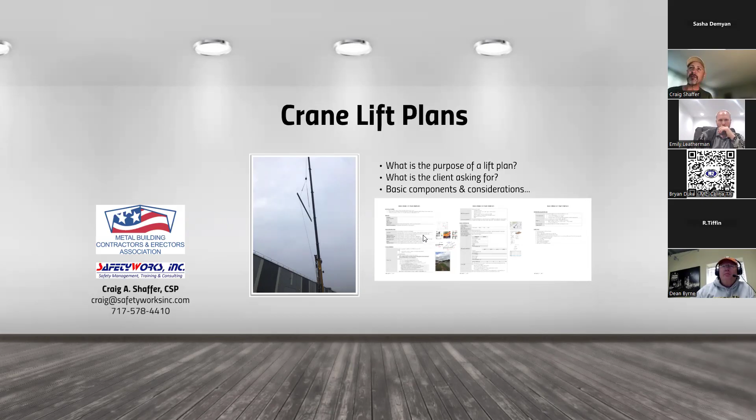One of the things, and I'm actually going to zoom in here a little bit on this, that's come up in some discussions leading up to this is, before you get started, talk with your client just to get their perspective of what they're expecting. Some clients don't expect anything, or they're not asking for anything. And some clients, on the opposite end of the spectrum, want an awful lot.

Some folks like the Army Corps of Engineers, maybe the Mine Safety and Health, MSHA folks. You could be working at a refinery, on or near an airport, hospital, places where they very much, due to the exposures around them, want a specific lift plan. And while this basic lift plan that we're going to go through covers a lot of material, they may want their own lift plan filled out instead of this one, or they may ask that you submit some additional information along with your lift plan.

So it's good to know that information up front as we go through this template right here. And as you're filling one out for your projects, you don't want to go through the whole thing and then find out they have their own form they want you to fill out, or there's additional information that delays your lift date and things like that.

I know, personally, sometimes I'm involved in pulling together a lift plan, but a lot of times I'm involved in reviewing them. They've been submitted by a subcontractor lifting anything from steel and metal building components to HVAC units to all kinds of different things. I usually ask for these about 2 weeks in advance. It gives me a chance to go through it, gives them a chance to provide any information I need.

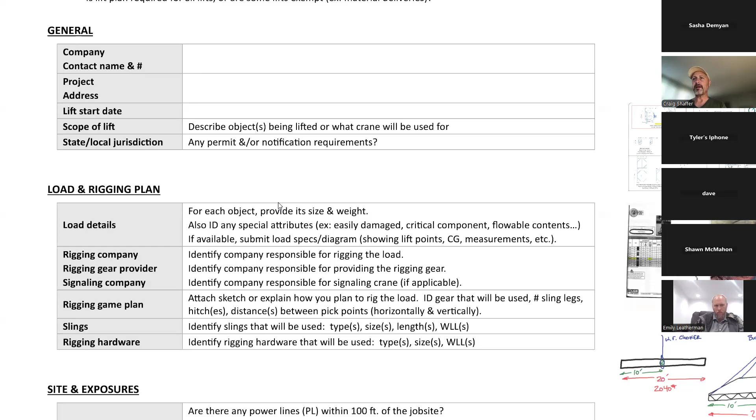And the other item that I had here in general is whether or not there's state or local jurisdictional requirements. I live here in South Central Pennsylvania. For the most part, not too many of those here, but I know Dave Lombach with Kaiser Martin. They run into some folks that might be the Army Corps of Engineers. It might be MSHA, and sometimes they run into situations where there is either permit or notifications or additional information required for that. So I know some cities get into permitting.

I know some jurisdictions, state. I know down in Maryland, not too far from me, if you're doing a special lift, if you're doing a tandem lift or more than one crane's making the lift, or if you're setting up, tearing down, or jumping a tower crane, they require a 48-hour notification to their, I call it Department of Labor, but I forget the name of their agency at the state level.

So again, depending where you are in the country, it's just something to remind you to check in. Are there any permits or notifications you need to make ahead of time? And again, depending where you are and what you're doing and who you're doing it for, you may have to or you may not. So that's the first one, just some general information.

I move on to the next part of this plan, and it's a little bit about the load and rigging. I talk a little bit about the load and rigging plan here, and then we'll get into the site itself and the exposures that might be on the site and things that go into helping us choose the right crane for the job. And then we'll talk a little bit about the crane specs, the size of crane, some other important information about the crane. We'll talk about the lift capacities of the crane, and then we'll get into personnel. So those are kind of the main parts of this.

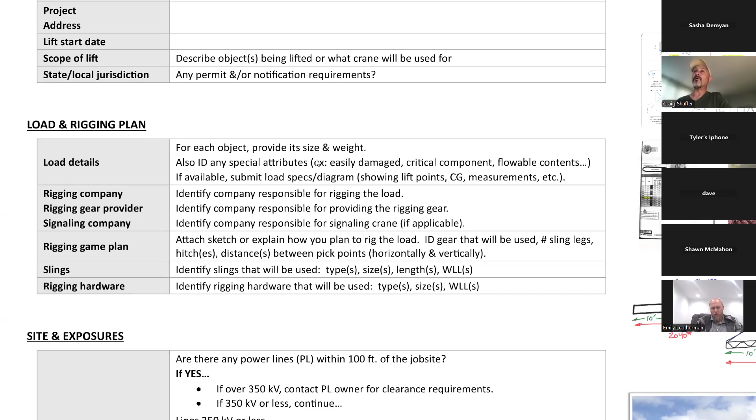A little later on I'm going to talk about critical lifts. One of the things that typically makes something a critical lift is you're lifting something that is in excess of 75% of the crane's capacity. I know some companies use 85%. I'm going to use 75% today in our discussion, but whatever you use.

But sometimes a critical lift is also lifting an object that is just very hard to replace, or the time schedule to get a replacement is very long. But anyway, just identifying that in the load details, and sometimes flowable contents too - a piece of equipment or machinery that maybe has something in it that can flow, that can cause a different distribution of the load as it's being lifted. Just little details like that make this load maybe something a little different than what a typical lift is.

Personally, when I'm looking at a lift plan and reviewing these kinds of things, this kind of information helps, and it helps minimize the amount of back and forth I need to have with folks, just to get an idea of what are we lifting here, what is its size or weight.

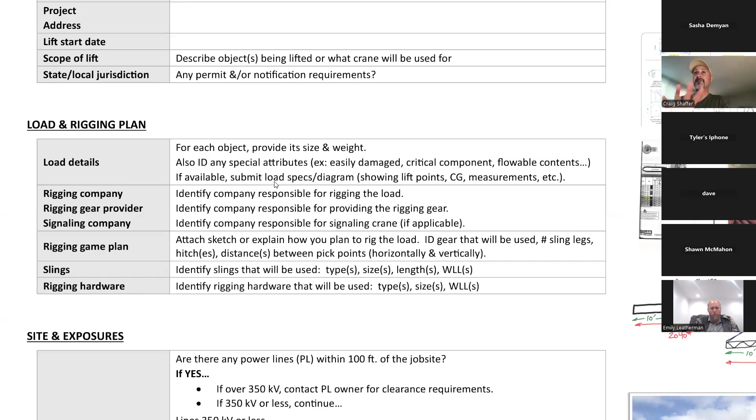For most things, a diagram, for steel components and things like that, we may not need a diagram of the actual object or of the site. It helps me to see what all is being shown. But I wanted to zoom in on this - this was a special medical device. It's called a gamma knife.

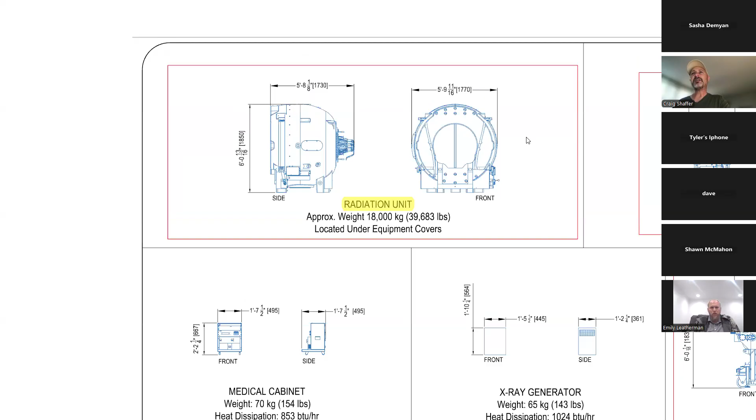For you folks that have cranes that may be rented out to lift objects that have little to do with metal buildings, something like this - there were other specs submitted that showed where the lift point was. It gave me an idea of what was being lifted. There was another spec that showed where the lifting eye bolts screwed in, and the distance between them and things like that.

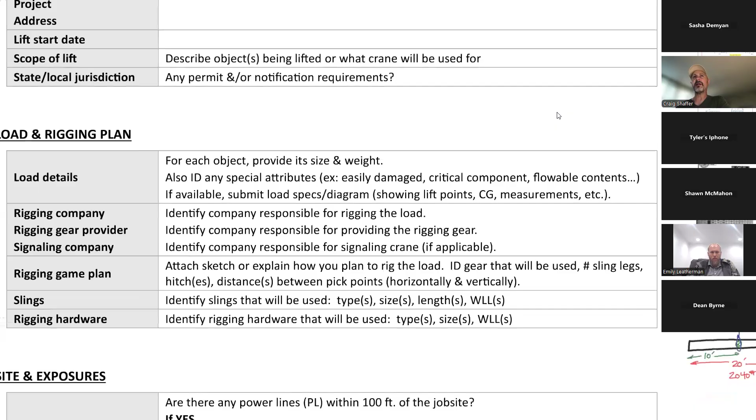So it provided a little bit of information for me to look at in terms of what all was going on. When you're putting together a lift plan, especially where somebody's going to be reviewing it, you're basically telling them a story. And our story starts with a load, and then it evolves into what we're rigging.

With something like that - now I don't have one in this little presentation here - but with that gamma knife I just showed you, they also had a diagram showing where its center of gravity was. Now it was a little less of an issue because the lift points, the eye bolts, were engineered.

But again, I can remember back a number of years ago, there was a large 20-some thousand pound rooftop unit being lifted onto Hershey's Children's Hospital, and they showed not only a diagram of the size of the object, but exactly where the center of gravity was and the specifications - how many inches from the left end the center of gravity was, how many inches up it was - showing exactly where the center of gravity was for lift planning purposes.

So again, with specialized objects, critical components, things like that, those load specs become very important. So that's a little bit about load details - you're just explaining what's being lifted. And not all of these things, depending on what you're lifting, are pertinent - some of it is, some isn't. From one lift to the next, or one job to the next, you can sort out of this rigging plan what's important and what isn't, but most of the stuff is.

Look at the next item here: rigging company, rigging gear provider, and signaling company. Personally, that's important to me. A lot of the rigging plans I get require information from both the company using the crane and the folks providing the crane. Sometimes it's the same company, sometimes it's not. A lot of the crane plans I get just come from the crane company, and if they're not doing the rigging or providing the gear, I don't necessarily get everything I need.

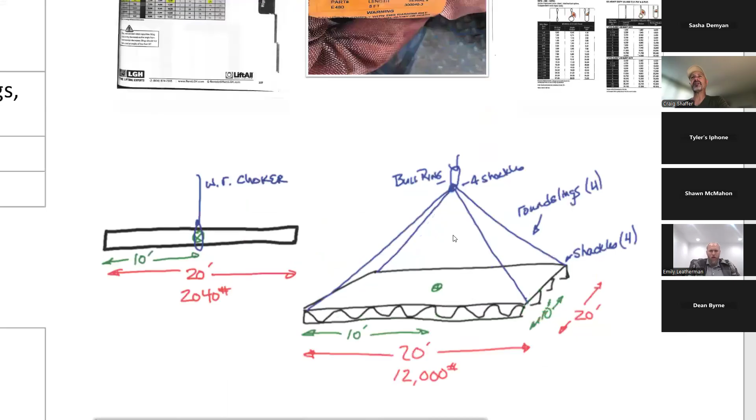Something like this—I call it my chicken scratch diagram—let's say it was a fabricated deck panel or something. These are supposed to represent bar joists. I'm a pretty poor artist, but you get the idea. Something that helps me visualize if somebody was lifting something like this into place lets me see what they're talking about. This one over here to the left is just a simple beam—I wouldn't expect somebody to have to sketch that.

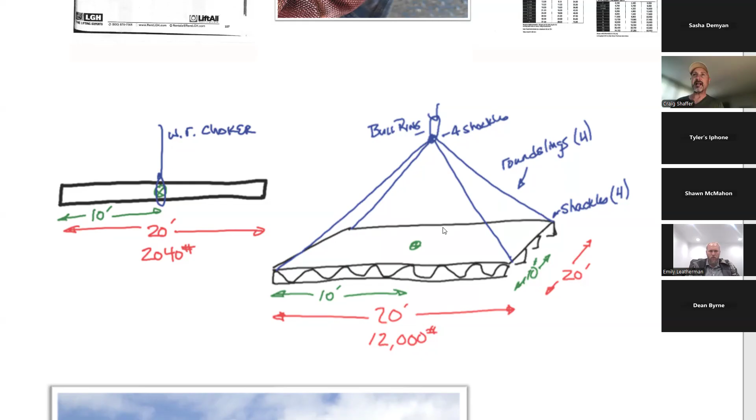But this one over here to the right, let me zoom in a bit—it shows the deck, gives some dimensions, and puts a little crosshair in the middle where we're anticipating the center of gravity is. It's basically showing four sling legs, with shackles making connections at the corners and at the top, and bull rings. It's a rudimentary sketch, but when I review it I can see we've got a total of 8 shackles, 4 round slings, and a bull ring—maybe more than one depending on the situation. It also gives me a distance between our connections, which helps me determine what our angles are going to be.

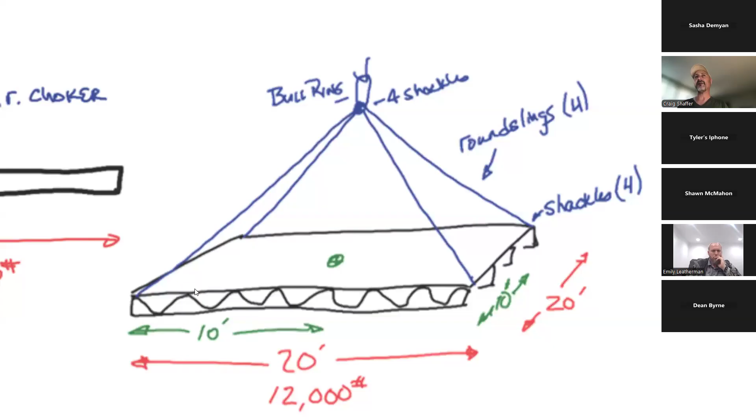My arrow is showing up on the diagram here, but we're talking about our sling angles. In this next part, when we're discussing our rigging, one of the things we indicate is not only the type—maybe round slings, maybe a 4-leg bridle—but depending how long those legs are, it helps determine the sling angle and ultimately how much they can lift. A little diagram like this helps a lot, especially if you have folks reviewing your rigging plan and lift plan—it helps them see it and hopefully generates fewer questions.

Now, the next part—that's the game plan, my thought process about how this is going to be rigged. Now I provide a bit more detail: what slings are we going to use? Identify the slings that will be used, what types—round slings, straps, wire rope, or chain, whatever we're going to use.

What's their size? From a wire rope standpoint, is it 1/2 inch, 5/8 inch, 3/4 inch, whatever it's going to be. For round slings, what size—size 7, size 5—again, those things are important. As far as sizes for straps, you're probably familiar with the type or size indicator on the strap.

It might be something like EE2-902, indicating it's a 2-ply sling, web grade 9 and 2 inches wide, whatever. But it just gives an idea of what type and size of sling we're using, and that way we can look and determine what the working load limits are.

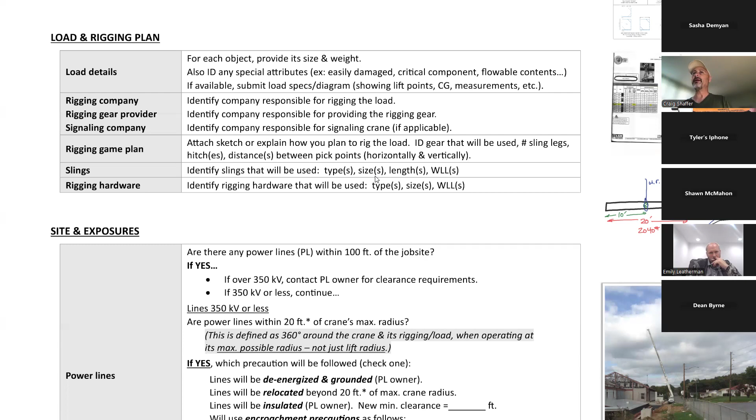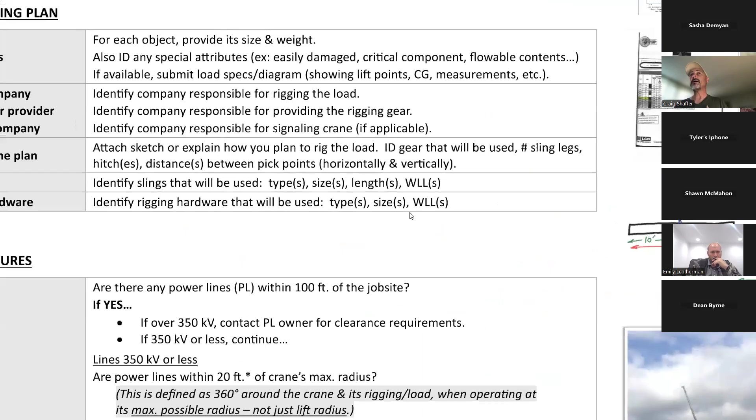It's important to put the length in there too, because when you go back to this drawing, it's important to know the length of sling. That helps determine what your working load limit's going to be based on your sling angle. So all those things are important when it comes to identifying your sling.

I've had folks do something like this - they'll submit with the rigging plan a copy showing here's the sling we're going to use. Here we've got 1, 2, 3, 4, 5, 6, looks like a size 7 here that they're going to use. They're showing me basket, and they've highlighted everything for me, which is wonderful.

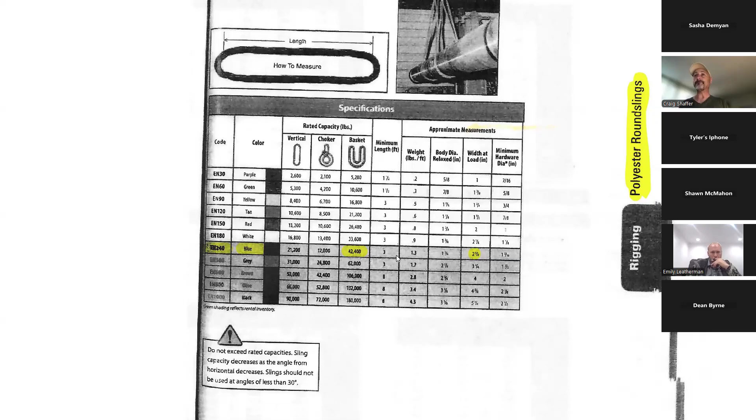Sometimes I get pictures - this is the sling we're going to use. Provides a lot of good information, most of the information that I need to know.

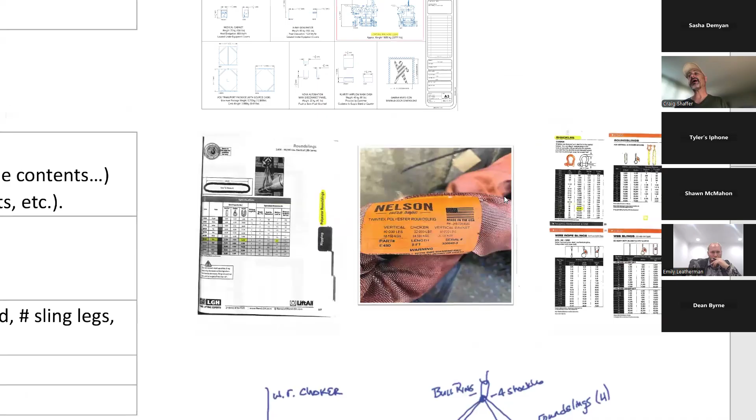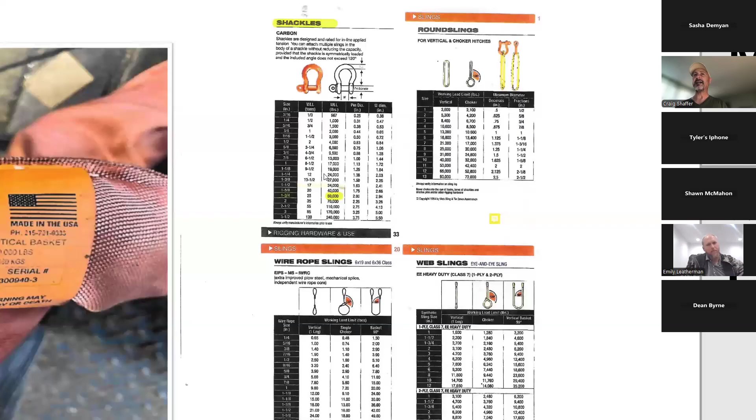And the same kind of information is important from your hardware as well - shackles, round sling shackles or eye bolts, hooks, things of that nature. Usually shackles are the big thing. Here they noted a 1 3/4 inch shackle.

One of the things I look at, particularly with round slings - some of you may have attended this back in Nashville in 2023 when we did the rigging class - we talked a little bit about round slings, and based on the size of your round sling, there's something called a minimum stock diameter. Whether you have one sling or two slings going into the shackle, that's just the diameter the shackle has to be to allow the yarns inside, the core yarns inside the sling, to adjust properly.

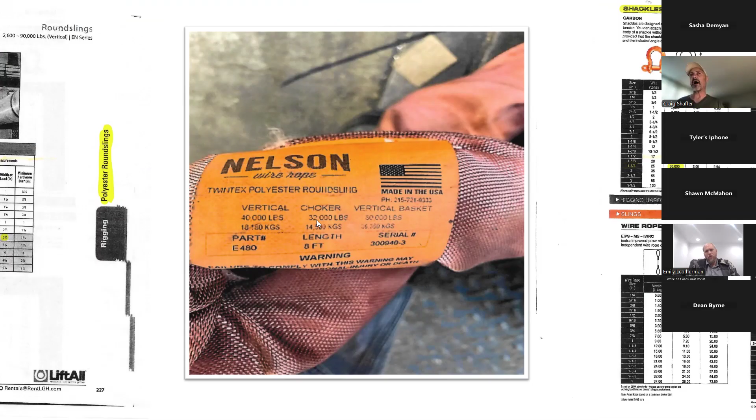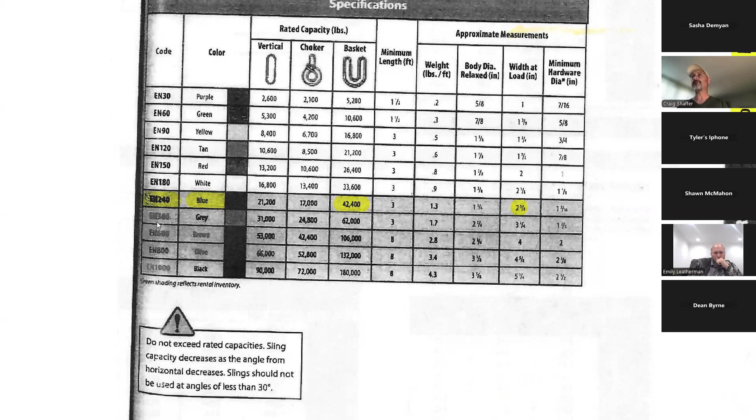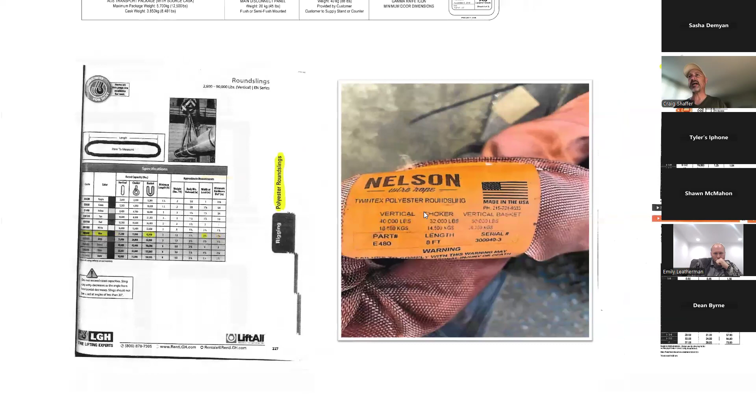So one of the things I'll look at, for example for an EN 480, I can go into my charts and look and see, okay, for an EN 480 that's being used right here, what's the minimum stock diameter? Just so that not only are they using a shackle that is properly sized based on its working load limit for that share of the load, but also that provides the appropriate minimum stock diameter.

Interestingly, with these folks that submitted this plan to me, back to this Gamma knife for a minute - they submitted a great plan, they did a really nice job with it. There was only one thing I picked up on, and it was minor, quite honestly. They provided the shackle size for this, and it was the correct shackle size for capacity, but in all actuality they needed one size larger to provide the minimum stock diameter.

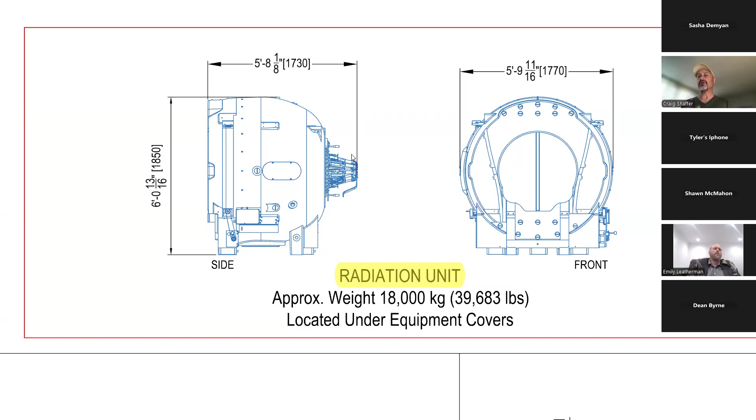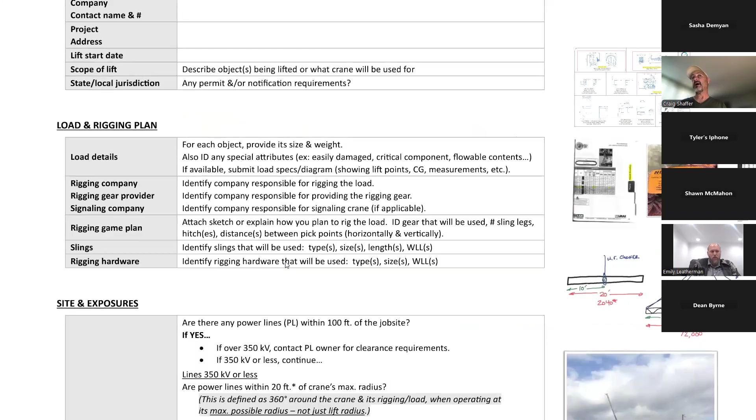So I think that's important too, especially if you use round slings a lot - I know a lot of people do - but that kind of gets into hardware. Identify your rigging hardware that will be used, the types, the sizes, and working load limits.

And providing these specs is really nice. It allows somebody like me, or whoever's reviewing your plan, to take a look at it. Just make sure what you provide them is the rigging you actually use.

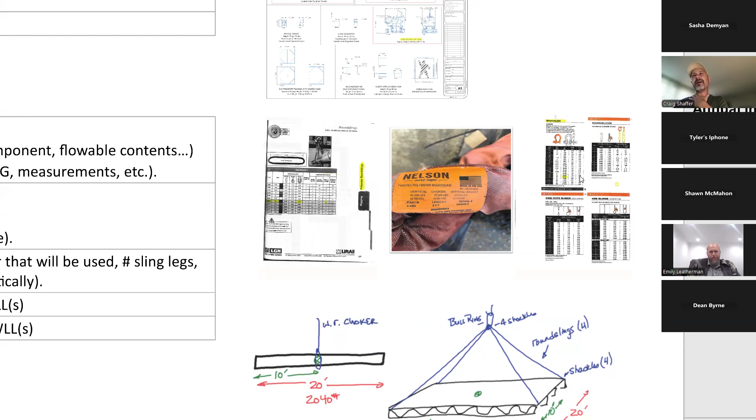A couple times I see we get this kind of information, and then I go out on the site, and maybe the information they provided was from Crosby, but I go out on the job site and they are not using Crosby shackles or anything else. So it's just important to make sure it's specific to the manufacturer.

So those are just some things involving load and rigging plan, and some of the most important details. You can certainly add to any of this plan as you go along. Some of you are pretty involved in putting rigging plans together and may have a rigging plan that goes well beyond this, but that's the load and the rigging part of it.

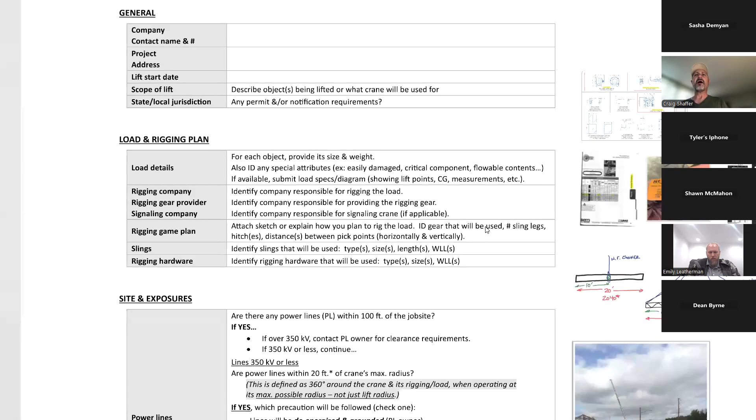The next part comes to site and site exposures. This was a job site I was on a few years ago - I was there with a general contractor, so there's a lot of things going on. This was a school project, and looking straight down the roadway, we're doing some steel work and swinging, but we do have power line exposures. Talking to those folks - Shaffer, we're not swinging over that way.

We're swinging over here to the building, and I get it, but there's some things that we need to do, even if we're staying at least 20 feet away from these lines, or maybe even 10 feet. I'll explain that more here in a minute. There are still things called encroachment precautions that we most likely will have to take.

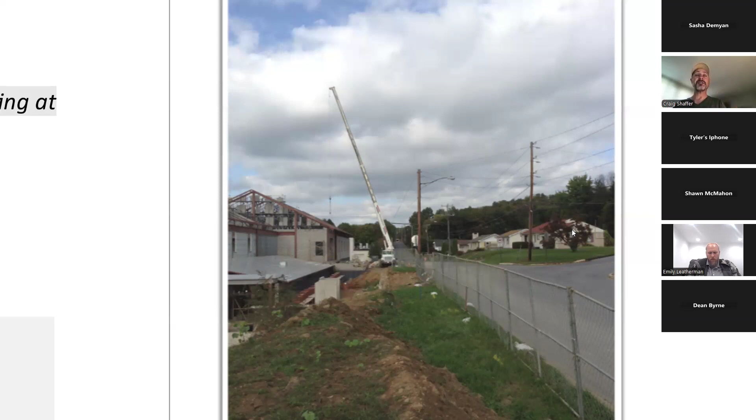So I'll come back to this in a minute, but before I get to it, let me talk about site exposures. We're going to talk about power lines, and then I'm going to come up here to the top and talk about other site exposures. But let me hit power lines here first. The first thing I ask is, on this job site, are there any power lines within 100 feet of the job site? Sometimes I'll even say 150 feet. I just want to know what we're dealing with.

And where they are, because again, our crane may be set up 70 feet away from the power lines. Are there any power line exposures? They'll say no. But yet, if I go out to the job site and the power lines are 70 feet away, well, Shaffer, we're not swinging that way. We're 70 feet away. We're fine. We just got to stay 20 feet. We're good. And that's fine. But,

in a situation like that, you're going to see this little part here in gray where it says power lines within 20 feet of the crane's maximum radius. This is defined as 360 degrees around the crane and its rigging or load when operating at its maximum possible radius, not just the lift radius. So if the crane at maximum radius could get within 20 feet of those lines, we have to do one of these things down below. So that's why I'm asking, is there anything within 100 feet of the job site? Just so I know where we fall into play down here.

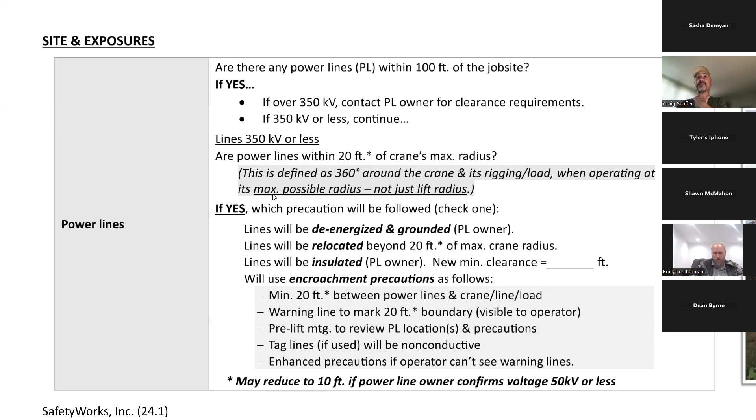But anyway, if the answer is yes to this, like I said, we got 4 options. We can have the lines de-energized and grounded. We're not doing that. That's got to be the power line owner. And again, I can't speak for anybody else, but I know here in Pennsylvania, at least where I live, that ain't happening tomorrow, and it ain't happening next week.

That's something we've got to plan in advance with those folks. I can't say they're not in a hurry, but it's a while till they get there. That's preferable. I mean, if they're de-energized and grounded, there's no clearance requirements then.

The next thing, the lines can possibly be relocated. I've had that happen. Again, at least here, it doesn't happen soon. It's something that takes a while to plan. But they have relocated the lines, or sometimes they'll put an outrigger on a power line to move the lines farther away to gain us those extra couple feet we needed. So that's an option. The relocating would be done by the power line owner as well.

The next one, lines insulated. Again, where I'm at, it's not often that the power line owner will put a dielectric or insulative covering over the power lines. Maybe they will where you're at, which is great. A lot of times that will reduce clearance. If so, that's great, and then you can put what the new clearance is. But those are 3 options that we have that are preferred. Obviously, de-energized is the best if we can do a scheduled outage.

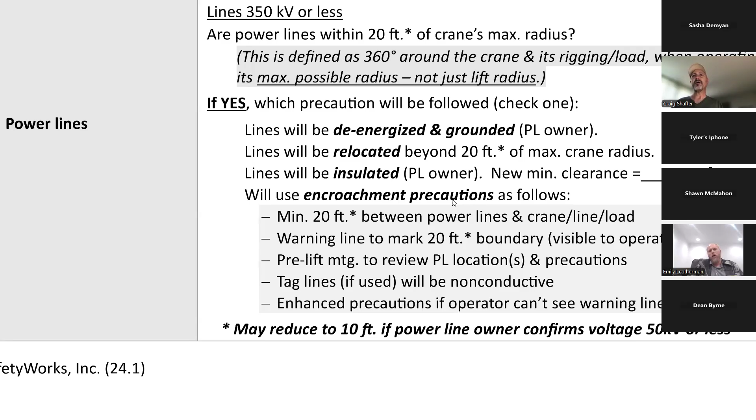But listen, you look at this 4th option. It says, we'll use encroachment precautions as follows. So I'm looking at the diagram that shows where the crane's going to be set up. And yes, at maximum radius, we could get within 20 feet or 10 feet of those power lines. However, where we are picking up our steel, where we are swinging it, it is not coming within 20 feet or 10 feet. That's where encroachment precautions come into play. They're pretty quick, pretty simple and easy.

And these are what we got to do. I rarely see these, but this is what we got to do. First of all, we got to maintain that minimum 20 feet or 10 feet to the power lines. Second thing, warning line to mark the 20-foot boundary visible to the operator. Now, listen, it can be flagging, it could be cones. I've seen high vis markers, things like that, but just something that sticks out to the crane operator and to the people rigging, signaling, and that are in the area, that the crane cannot go beyond this point. So even if we're 70 feet away, you still got to put those up. It's not hard. It doesn't take long, but that visual barrier still has to be there.

And that's important. Next, pre-lift meeting to review the power line locations and precautions. So as part of the pre-lift meeting, it's kind of, hey, don't forget, we got power lines over here. We got the cones, we got the high vis markers set up. Just a reminder, you folks that are signaling, don't swing past that. Crane operator knows not to swing past that. All stop before we get to that point. Tag lines, if used, will be non-conductive. So non-conductive tag lines or use of insulating links for the tag lines if we're going to be in this encroachment range.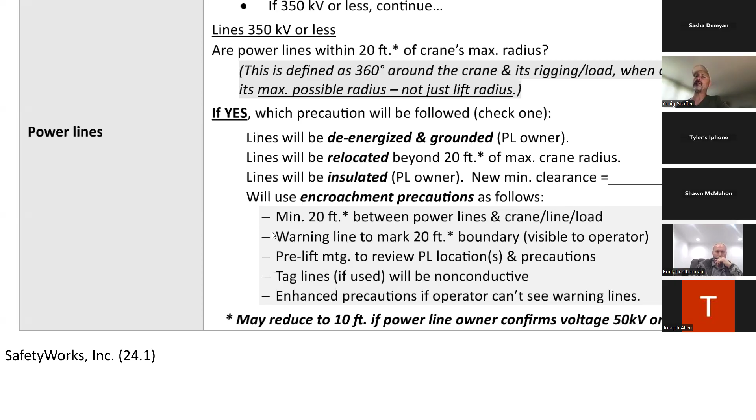And finally, enhanced precautions if the operator can't see the warning line. This involves the use of spotters and another safety precaution. There's a number of those. If you need them, you're welcome to email me or call me. But there's range warning devices. I know I had a crane one time where we used an insulating link in addition to the spotter. So those are both options that were able to be used. This is probably, in addition to the surface on which a crane sets, one of the biggest exposures we have, and that can really ruin an otherwise good and productive day, is just knowing where these power line exposures are and what we need to do.

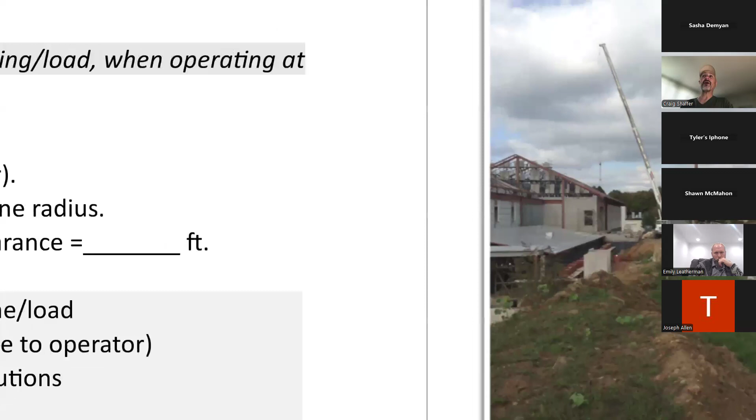I often run into cranes just like this one, where they were picking in the background. So at no point did they need to swing within 20 feet of those lines. I mean, they're pretty close to it right now. In actuality, they did call; I forget what the voltage was, but it was less than 50,000. So it was actually 10 feet was their required clearance. But they need to have cones set up kind of parallel along here just to mark their no swing boundary.

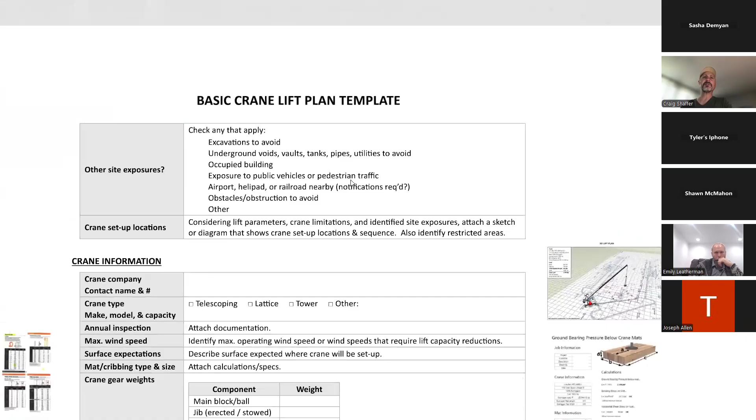Okay. Other site exposures. So power lines are a biggie, but listen, are there other things? And this is where a general contractor is helpful as well. As a matter of fact, there are a couple things. When we deal with cranes, there are two things specifically that a general contractor is responsible to do.

The first thing has to do with these items right here. Identifying and notifying the crane operator, I guess more so the second item here, the ground underground voids, vaults, tanks, things like that. If the general contractor is aware of any of these things, underground voids, vaults, tanks, pipes, utilities, they need to communicate that to the crane people, obviously, so we don't want to set our crane up over, especially outriggers. We don't want it over top of that. So if they have been informed of this through maybe a municipality or by the client itself, they're responsible for forwarding that information to the crane operator.

The other requirement GCs have is to provide a safe location for the crane to set up, and I'll talk about that here in a minute. But other things, just to identify in our plan, whether there's excavations that we need to avoid when we set up the crane. Is there an occupied or partially occupied building where an evacuation or partial evacuation may be necessary for parts of the lift or the whole lift? Exposure to public vehicles or public traffic where a traffic control plan may be needed. Is there an airport, helipad, or railroad nearby requiring notifications and coordination there?

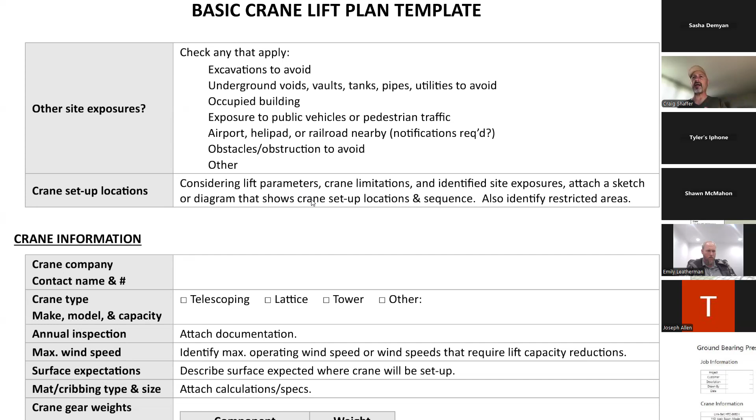Consider lift parameters. In other words, all right, here's what we got to lift. Here's how far in off the roof or how far in on the pad that we have to lift it. How much it weighs. That and lift charts all kind of determine what size of a crane we're going to need. But now, we also have to consider, okay, we'd like to set up where it's an 80-foot radius. But you know what? This area where it's 80-foot radius has some pipes running underground. We can't set up there. We got to set up at another place that's now 100 feet radius or 120 feet. So again, some of these things up above may drive where this crane has to set up.

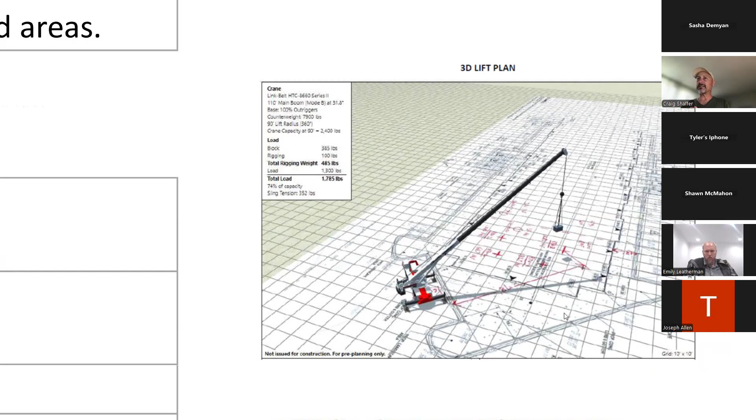So consider our sketch, considering lift parameters, the crane limitations, and identified site exposures. Personally, I like to see a sketch because it just kind of visualizes. Here's a pretty nice one here. Just showing here's the outline of the building, or the pad. In this case here, they're setting what appears to be an HVAC unit onto a roof, but it shows me where the crane's at, and they've added some additional information. It's kind of hard to see here. I lose a little bit of the definition of this picture, but anyway, they're giving me radius here, giving me some other important specifications for this lift. What we're getting into next is the lift plan.

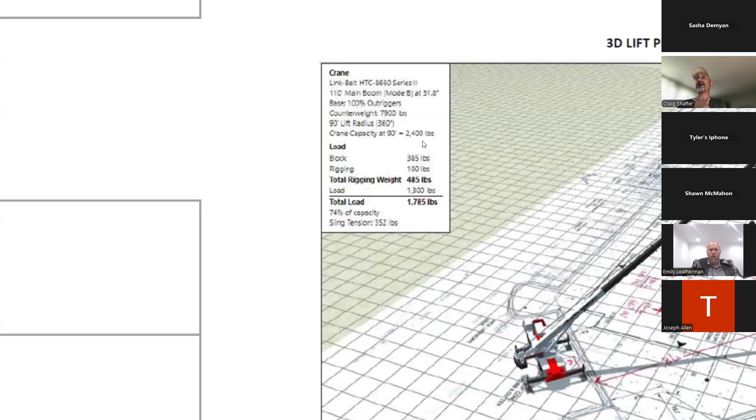So not only is this telling me a little bit about the crane, the base that they're expecting, lift radius, it tells me the crane's capacity for what they're being set up as, but also the block, the rigging weight, the total rigging weight, the load capacity. So in other words, we're going to get what our total load is between the rigging, the crane items, and the load, and we're going to compare that to what the crane's capacity is. That's really what part of this is right here. This gets into the crane information.

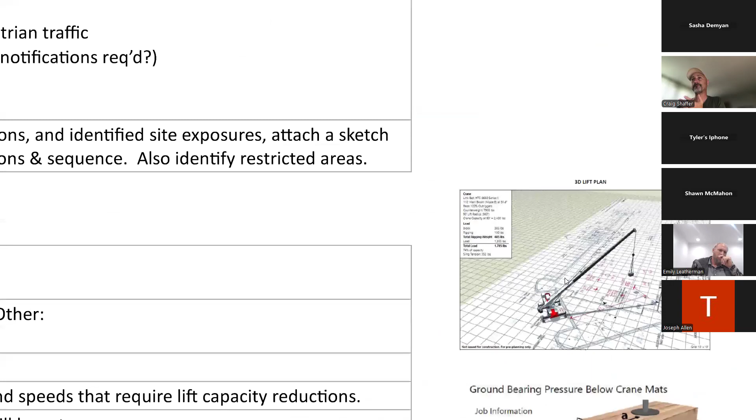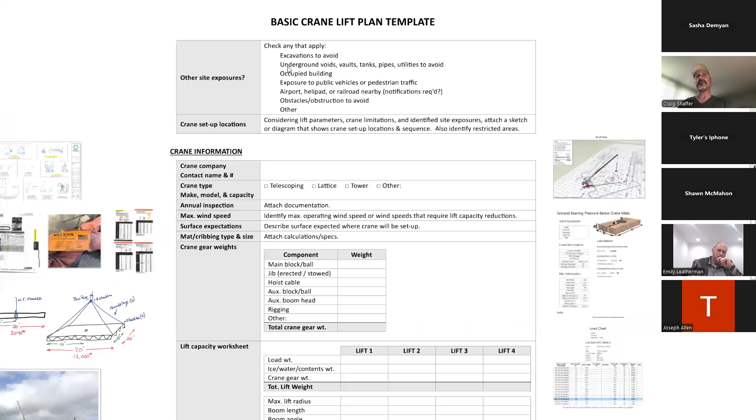But the reason I really showed you this picture is it gives me an idea of where the crane is setting up, where it is reaching to, so I can see where we're planning. Sometimes it's just one place the crane's setting up. Sometimes it's multiple places. And again, providing that information to whoever's reviewing your crane plan is very important. Now, looking over here to our next segment. This last segment was a little bit about the site and site exposures. This next one is about the crane.

And now, ultimately, we are getting down here where it says lift percentage of crane capacity. A lot of these lift plans have this in. I really like when they provide that. They've done the math for me. This is a number I'm looking at.

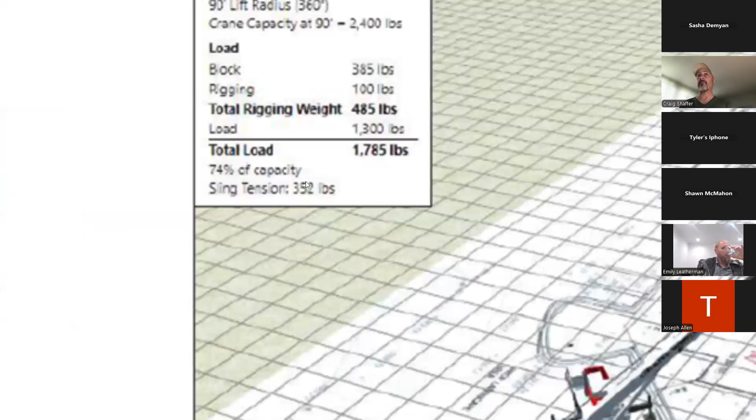Quite honestly, I prefer to see it below 75, which this one barely is. You get over 75, you have a critical lift. And a lot of folks, including myself, want a critical lift plan at that point, which involves some more documentation.

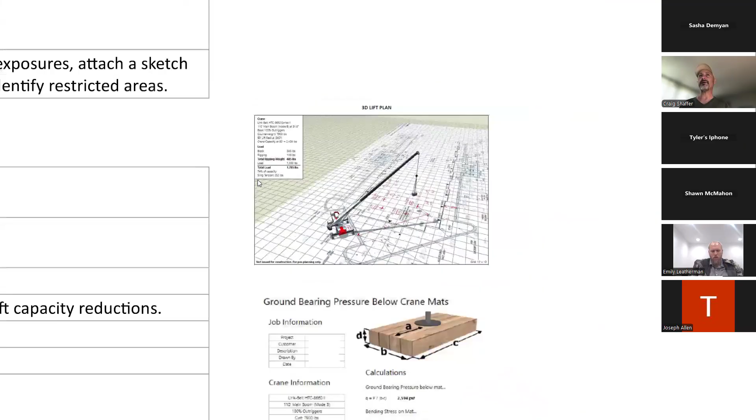But let's look at crane information here a minute. First of all, who's the crane company and what's the contact name and information? So that's the first thing, pretty easy. What type of crane are you bringing onto site? I know for me, most of the time it's a mobile telescoping crane, but sometimes it's not. Sometimes it's a different crane.

Make, model, and capacity. I ask that they attach documentation of their current annual inspection. Just something that I review, that I match that crane inspection documentation with the crane that they have just identified in the previous section right here.

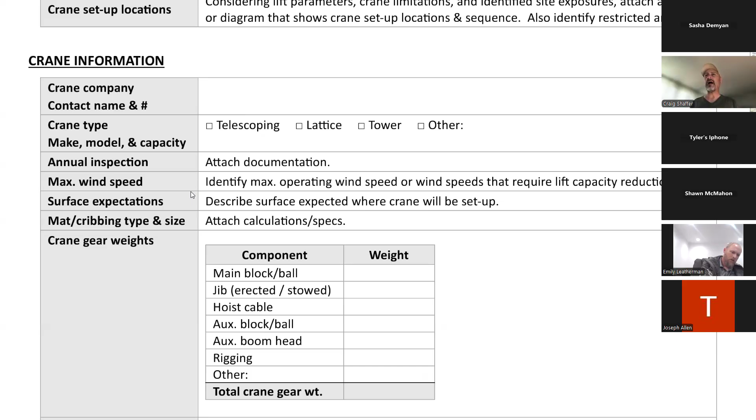Maximum wind speed. Personally, I don't want this to be a subject of debate on the job site. This should be known ahead of time. The crane manufacturer sets what their maximum wind speed is. Some cranes say, look, you are good up to this amount of wind speed. And others give it graduated: up to this wind speed you're good, up to the next wind speed you have to reduce your lift capacity by X number of percent, and then you can't go beyond this wind speed.

So whatever those parameters are, I want them known ahead of time so that not only us, but the general contractor, everybody's on the same page. I'm quite sure everybody here is probably familiar with the big blue crane collapse years ago when they were building the Milwaukee Brewers stadium, Miller Park. Wind speed was a key factor in that. And what we're trying to prevent is poor decision making. When this is known up front, we're all understanding it.

Surface expectations. This gives my crane folks a chance to explain to the general contractor what surface they need to set the crane on. A lot of times it's pretty straightforward, an improved base or something that can hold so many pounds per square foot, or something with a gravel base, whatever your crane manufacturer specifies, but you're communicating this up front.

Because again, if we're working on a site where we've got an awful lot of mud and it's kind of sloppy, soft, things like that, it gives them a chance to coordinate with the site contractor and get improvements made. They are responsible for providing a surface that is acceptable for our crane to set up on. And by the way, for you to lay your steel down on as well. That certainly applies also.

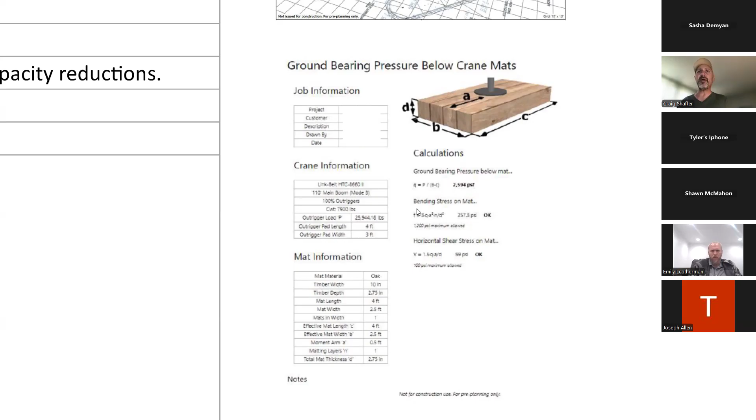So down here, it's oak material. They give the specs on the height, the width, the length, and all that kind of stuff there. But then I'm looking down through here. This is the mathematical part: here's the maximum allowed, here's where we're at, we're good to go. Here's the maximum allowed, here's where we're at, we're good to go. So I can see this.

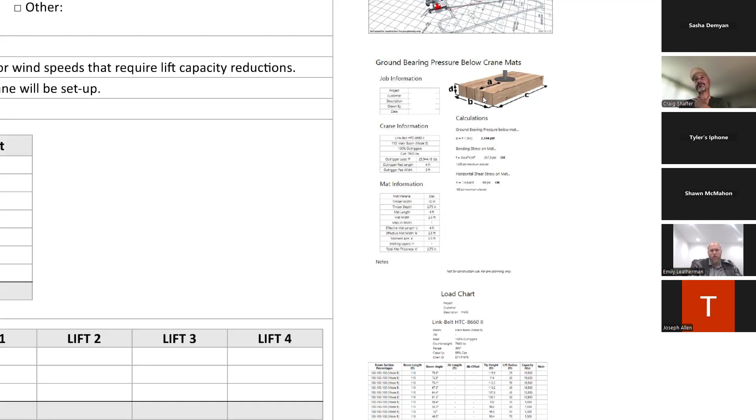Now, it also shows my superintendent this is what it should look like, versus three 4x4s. I'm being a little ridiculous here, but not all the time is it nice, neat, and tidy like this. And sometimes I get some sloppy cribbing that is not what was advertised in their lift plan. So I do want to see this kind of information.

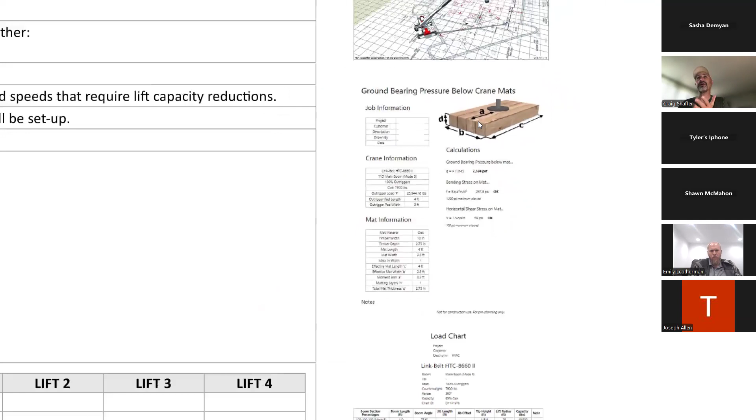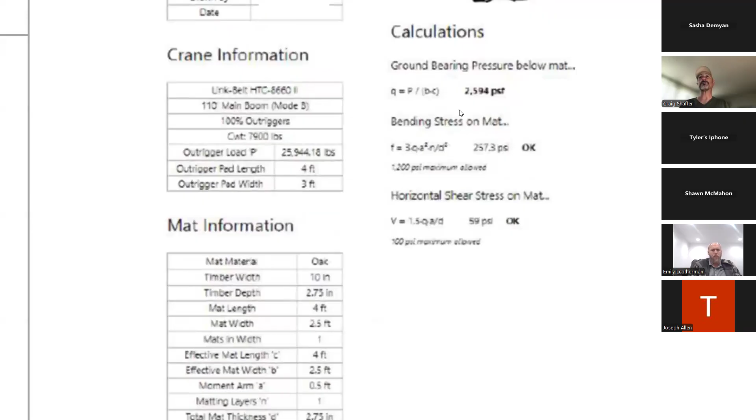So again, for the crane company, this is the stuff that gets spit out in their computer programs, but it's really nice for somebody who's reviewing it to make sure that your crane will be able to rest on a surface. It's providing our ground bearing pressure below the mat. Right there, it's telling you how many pounds per square foot, and they can compare that with the bearing capacity of the soil or the surface. So it's good information, important information for them to have.

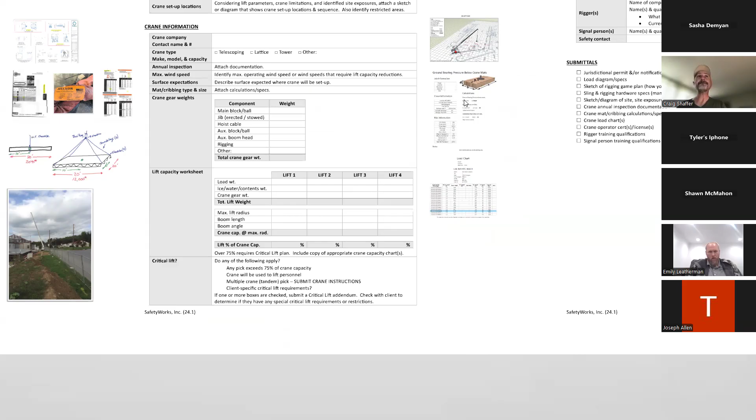And again, I can't speak for the Army Corps of Engineers, but I can imagine they look at stuff like that. The next thing up here in our crane information is just the crane gear weights. You saw this a little bit in this crane plan that was listed up here. I'll zoom in just for a second, but you saw the block, 385 pounds. The rigging was 100 pounds, and there you go. But this just gives us a chance to add in any weight we need to add. So from the crane company standpoint, here's our total crane gear weight.

Down below, we're going to identify our load weight. How much is the weight of the load? You know, listen, I saw in the weather there's parts of the country already getting hit pretty good with snow. So sometimes, especially when we're lifting big items, ice, water, we need to account for that weight, because something with a large amount of surface area, it's an awful lot of weight. Sometimes we have specs that say this special object we're lifting for a client weighs this much, but that special object's got stuff in it. It's got contents in it that we might have to add weight for.

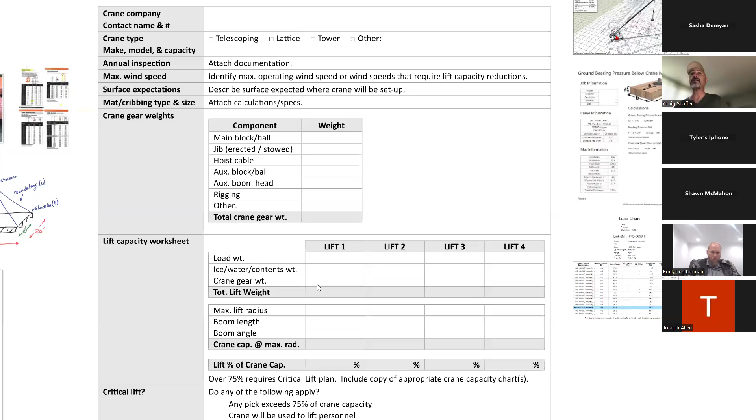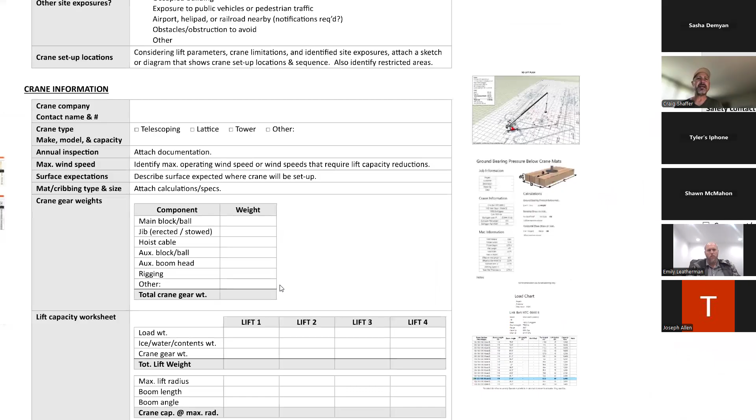So this is where we've got not a rigging weight, but our crane gear weight up here. And down here we got our load weight. Add that to the gear weight, and that's our total lift weight. So you saw on my example up here, the crane gear weight was 485. What they were lifting was 1,300. The total lift weight, 1,785, was what they came up with. So this lays out in a nice, easy to follow table what we're providing. And I have lift 1, lift 2. If we're lifting different objects, it allows you to provide for each one of those.

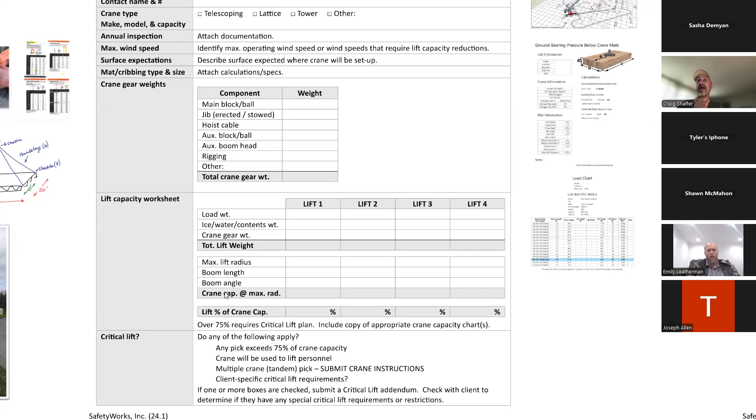Down here's where they're telling me about the crane. What's the lift radius? What's the boom length? What's the boom angle? And then what's the crane capacity at that maximum radius? Again, this lines it all right out for me. Up here, they told me the lift radius and the crane capacity at that lift radius. Up here's the boom and what the angle was, and the computer spits out 2,400 pounds. 74% capacity. So they took their total load, divided it by the total capacity, 74%. Again, we try to stay 75 or below with that.

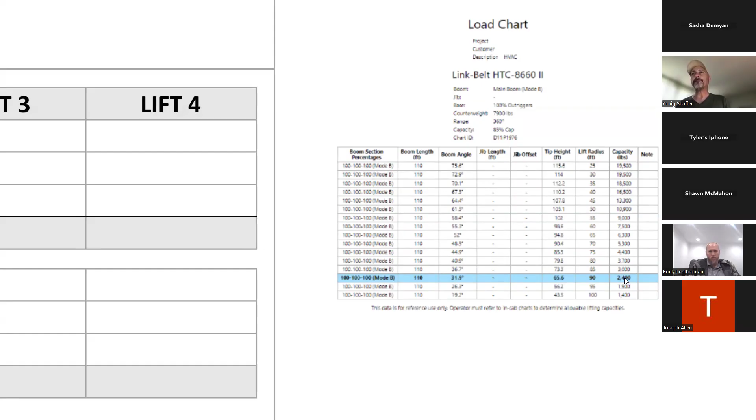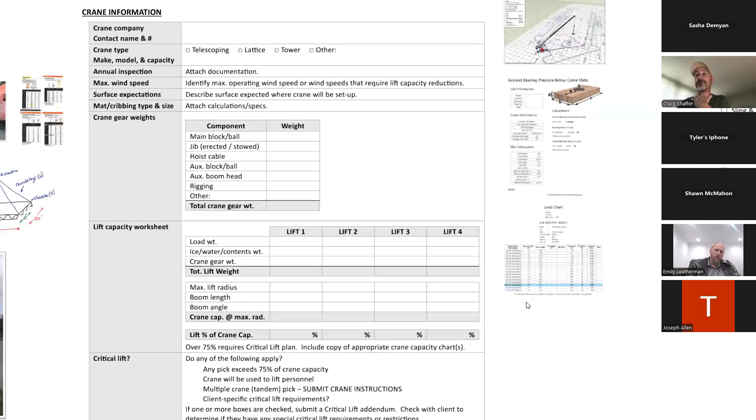But I like when they provide the load charts for me. This is the load chart that went with the crane they identified in that plan. And they highlighted the boom section, percentages, the boom angle, and came right over here and showed me exactly where the 2,400 pounds is. Again, depending who's looking at your lift plan, it could be trust but verify. Somebody like the Army Corps of Engineers: okay, that's great, Craig, you provided all that. Please show me the load chart from the crane operator so I can verify that. And I always do, and I don't think I ever run into problems. It's there, it's verified, and it's all proven.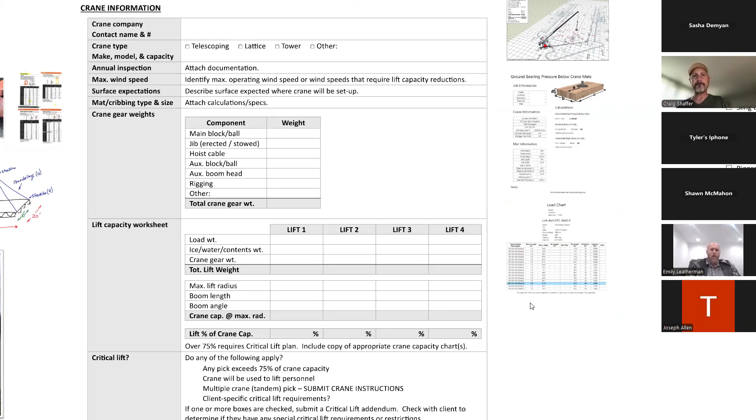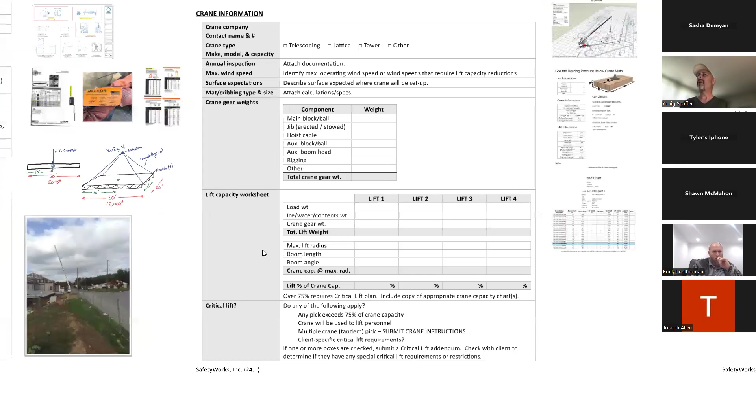So that's what that segment is. I didn't talk about critical lift yet. I'll mention that in a second. But over 75% is probably going to require a critical lift. You may also check with your client. Theirs might be a different percentage. That's where my last part here, having to do with crane information, comes in. Do any of the following apply? These are just things that I have on my lift plan, and it can vary from one client to the next. Does any pick exceed 75% of capacity? Will the crane be used to lift personnel, a personnel basket? Are we doing a tandem pick? Does the client have any special critical lift requirements?

If we're checking any of those boxes, we're probably going to have to submit additional information, which usually has to do with a verification of the load weight. It might be specs from the manufacturer, it might be scales, but something that actually verifies the load weight. And a lot of times in these critical lift plans, we're identifying the capacity of the crane not only at one point, but from the pick point, our start point, to our final resting point, to make sure throughout that entire swing path it does not exceed the crane's limitations. So sometimes critical lifts will get into some additional information there as well.

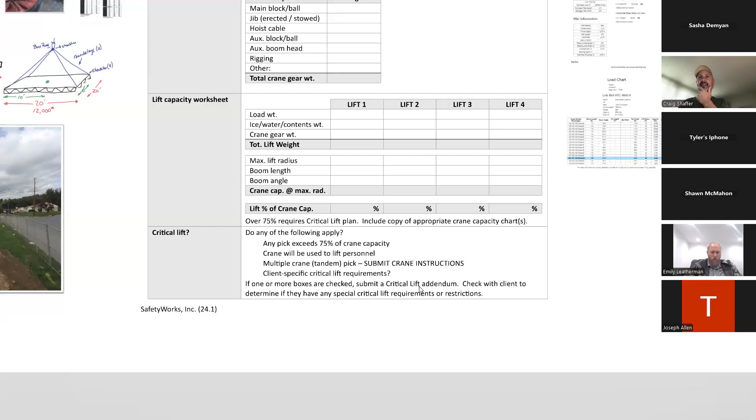Usually pretty picky on what the rigging is going to be used and things of that nature. So that's what that gets into. So again, it's just something to consider.

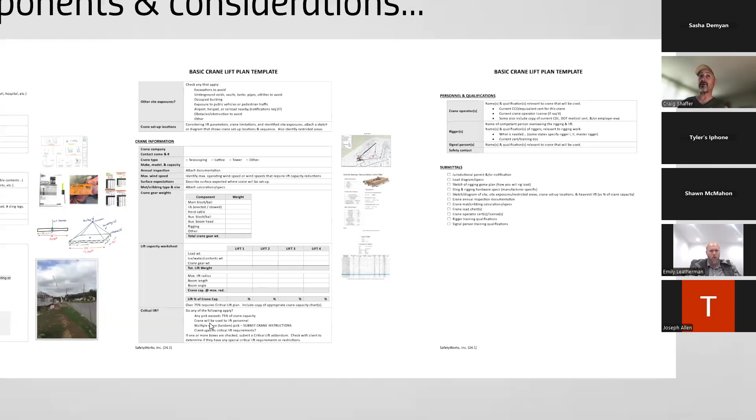Is this a critical lift? Most of the time I have folks that try to stay 75 or below in their percents here.

The last part of this program or plan is just some real quick on the crane operator. I'd like to have the names and qualifications relevant to the crane that's being used. Sometimes it's one crane operator. Sometimes they'll send me certs for 4 or 5 people because they're not sure which one's going to be there.

Just make sure that when we provide them the cert, that's appropriate for the crane they're going to be using and that it's current, it hasn't expired. So like a CCO or equivalent certification.

Some states, I know here in Pennsylvania, the operator's got to be licensed. Make sure that's current. And some folks also include copies of these operators' CDL, DOT medical cert, and or sometimes even employer evaluations. Again, if you provide those, just please make sure that they're up to date, or current.

With the rigging people, name of competent person who is overseeing this. Who's our person responsible for overseeing that this lift plan gets integrated and communicated to the rest of the crew? Also, who else is involved in rigging relevant to their work?

What is needed? Some states here in Pennsylvania, what's qualified? Well, you have to be trained, and your employer has to deem you qualified. In other words, you've demonstrated your ability to rig within the parameters of what you're being asked to do.

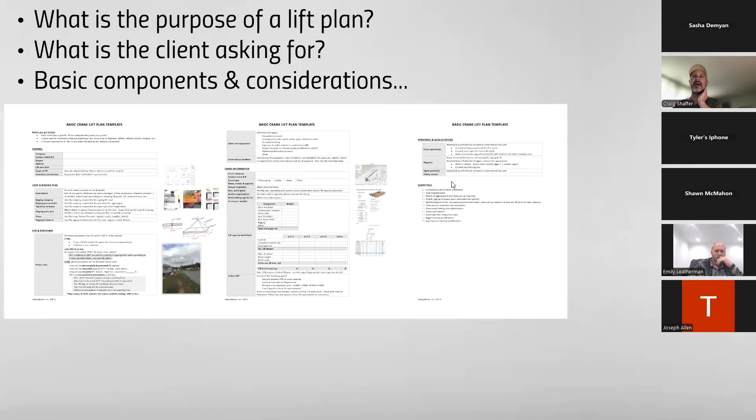And again, it never hurts to put in your plan here, who's the safety contact, just in case there's questions or whatever. A lot of times that's the individual submitting this. I guess I look on this, that's the one thing I didn't think as I was putting some of this together, I really should have put in here is the name of the person submitting this plan. Maybe that's your safety contact, but you can add that in there in the end as well.

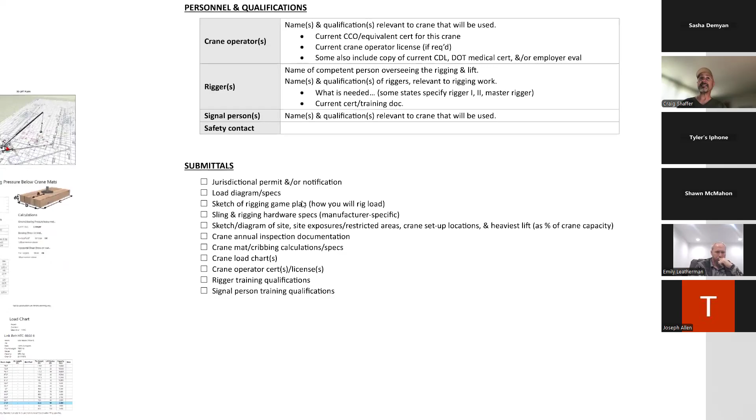The last item I have here is just a little check sheet of submittals. I didn't count them, it's probably about 10 or a dozen things here, but these are just things that we kind of promised we would submit along with this. And again, from my standpoint, when I review these, it just makes me feel much better about the lift plan.

So first of all, if there's any jurisdictional permits or notifications, that I've included that with this plan, or at least that if I've notified them, that I've attached documentation of that communication.

Load diagram and specs, these are all things we've spoken about here in today's webinar. But again, the load diagram or specs, if it's something that's more complicated to pick, especially that shows center of gravity, things like beams and columns, you're probably not going to have that. Sketch of the rigging game plan, how you're going to rig it. Again, something simple, I'm not expecting them other than to say, we're going to use a choker.

Something a little more complicated, a sketch or something helps. Sling and rigging hardware specs from the manufacturer of who we're going to use. Again, that helps me determine what working load limits are, especially when I'm determining your working load limits based on the angles of your sling. As you folks know, your sling angles impact how much we can lift, and what's the stress on the slings and rigging attached to it.

That's important: a sketch or diagram of the site exposures, any restricted areas, crane setup locations. And most of the time, I'm not asking for every lift, but what's the heaviest lift as a percentage of crane capacity? Sometimes it's the heaviest object, sometimes it's not - it's just a far reach, and that makes it a higher capacity when compared to what the crane's capacity is for that radius.

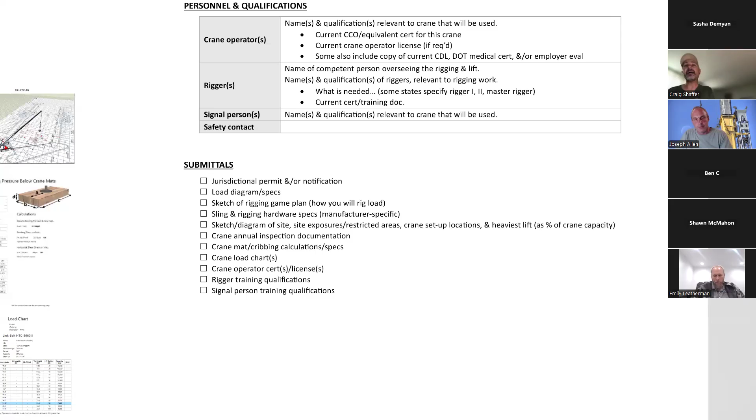When they go to ASME for things, I'll have to look at their standards. But their standards, as you know, they don't update them very often. So even if they do reference ASME, it's probably from the 1970s, an old deal. I know ASME updates periodically, but that does not automatically transmit into an OSHA update at all. So I guess I would put that back at our first part: for you folks that run into things like this, it's back to the client specific stuff. Are we going by OSHA here, or are you requiring something different? Maybe hammer that out with them ahead of time.

The second one that I put up there, I know we've talked about before, Craig, but for the benefit of anybody that might be a construction manager listening, is the clarification on telehandlers, because there are letters of interpretation that I get all the time, where somebody sees you hanging slings off the hook under the boom of a telehandler and they call it a crane, and it is not a crane. Can you elucidate on that?

I'm sorry, Joe, I'm just looking here real quick at other questions. We just had this conversation the other day - somebody had asked about my email address if you have questions. So I put that in the chat, I think it'll pop up there: Craig at SafetyWorksInc.com.

With regards to extensible boom forklifts and cranes, let me see, give me just a second. I'm going to see if I can pull up a picture that will be worth many words. Crane.

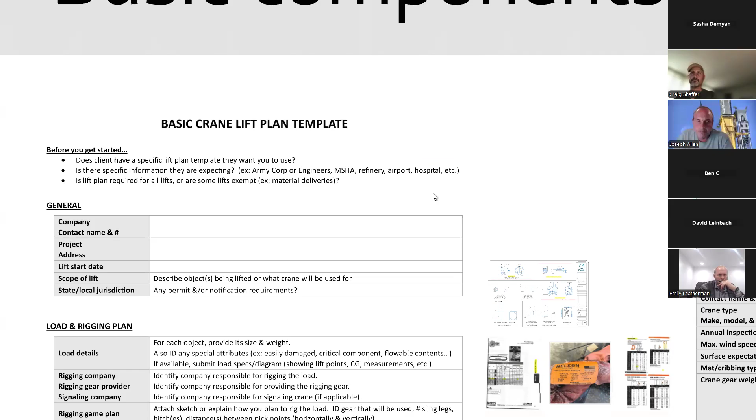While you're doing that, Craig, you do need to make sure, I know Joe knows this, but you just can't take any RTF and use the hook on it. You have to make sure the hook that's on it is approved by the manufacturer. That's a big thing today. You can't take your hook and drill a hole in the fork and be lifting stuff. We run into that where even when you have a fork mounted hook or something that was not built onto it, you have to get a letter or demonstrate that it was approved by the manufacturer to use any kind of attachment like that.

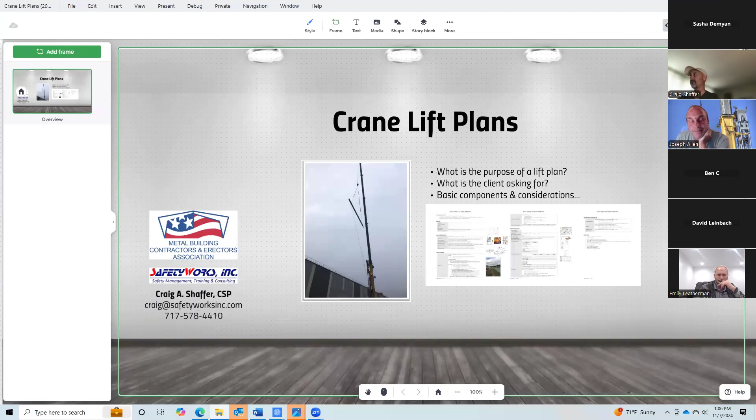There we go, fellas, thank you - that granted me just enough time to find what I'm looking for. So, jib attachments, manufacturer approved. Two things about manufacturer approved attachments for lifting: the jib, like you guys just mentioned, has to be approved by manufacturer. If you're not sure, the load chart on your forklift will indicate - if you flip it back to where they show jibs, most of the ones I see will list the serial numbers of the jib attachments that they allow. Then you look at the data plate on the jib just to make sure it matches one of those.

The other thing is some of your lifts on the back side of the forks, the carriage, or the boom, there's a shackle you can use for lifting, or a lifting lug for that, so we can rig from that. With regards to that, it gets into a situation where you look at the load chart, and does the load chart show a picture of those forks still on your forklift, or does that load chart show the forks have been taken off?

So if your lift has that lug or that shackle and it does not show the forks on there, you got to take the forks off for that load chart to be accurate. But in both of those cases, whether it is a manufacturer approved jib or we are using the shackle or the lug, whatever you want to call it, it does not render your rough terrain forklift a crane.

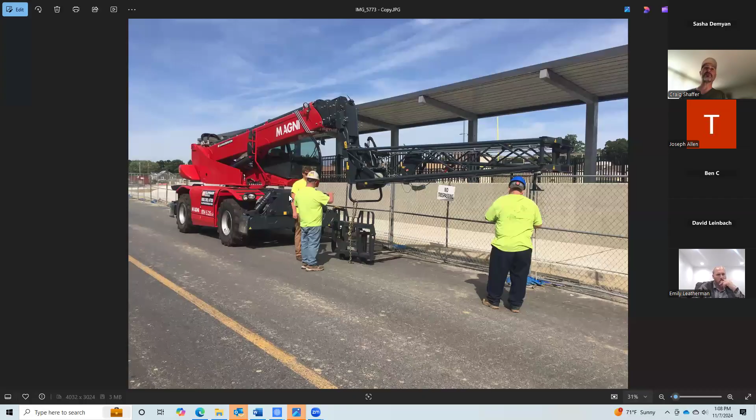Now, this picture, I rarely run into this, but this was one I ran into a couple years ago that did qualify for a crane. And this has all kinds of attachments. Most of the time, this was a rough terrain forklift. But what happens, this attachment, it's kind of hard to see here, but if I zoom in a little bit, you see the hoisting mechanism. And this is what makes this a crane.

So this is a jib that can raise and lower a load without using the boom. So they can place this, and this thing's slewed as well, to the side and everything. So this thing, once they got it up in the air and slewed to the side, they can use this hoist now to lower the hook. And this made this a crane.

And now here's where I got to go back and pull something else up, because quite honestly, I can't remember it off the top of my head. When you get something like this, that's a crane. Depending on what the capacity of this is, there are certain parts of the crane standard that no longer apply, but there are some that still do. And I want to say like 2,000 pounds. Yeah. Thank you, Joe. And I can't quite remember what was exempted and what wasn't.

And so they exempt things like if you're using a sheetrock winch, boom on a truck, something like that, it is not covered in the standard. But if you tried to use that to connect steel to a building, you're going to get hit for it. So it's a little bit different. If you're using it to load sheetrock into the second story of a building, it's not a crane.

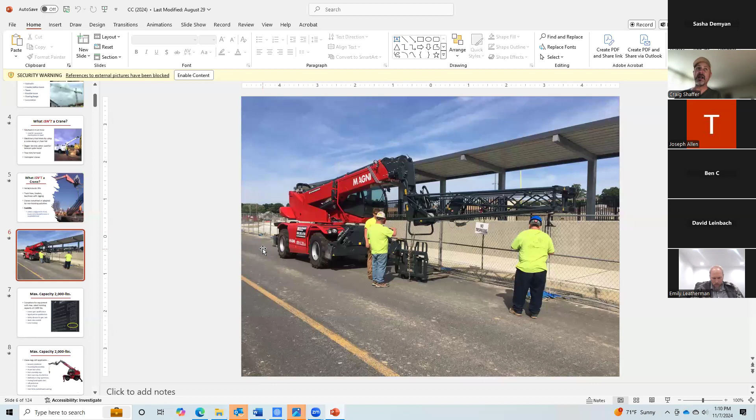Correct. And listen, for anybody, I have it buried somewhere, but I know I got it. There is an OSHA interpretation that kind of lays that out a little bit. If anybody needs that, let me know, and I'll find it. But that lays out what we were just talking about, the difference between this and something that does not have the winch.

You got two things going on now. You have the capacity of this jib, the winch, but you also have capacity and stability of your forklift as dictated by the load chart. So yeah, a lift plan would be great from my standpoint with something like this, so I can see that both things we are not overloading. We could be within our capacity for the jib, but not be within the capacity for the forklift.